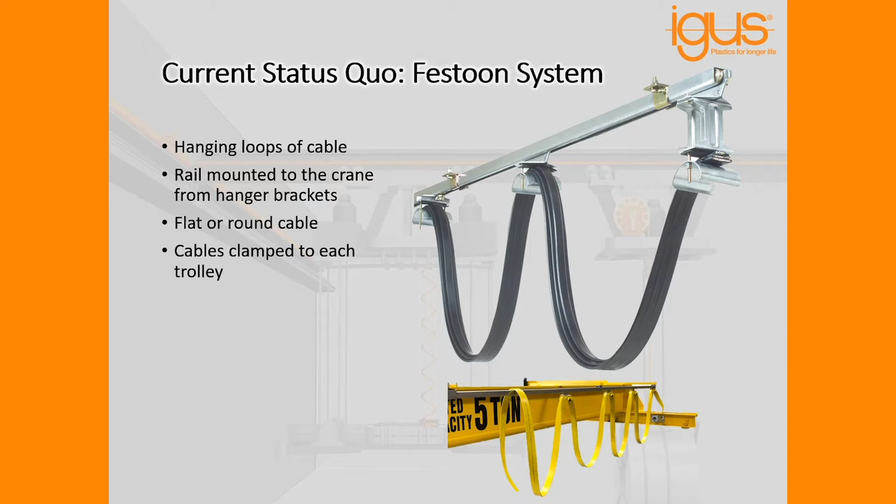It typically uses either flat or round cables depending on the configuration. The cables are typically clamped off to each trolley and they run inside of a rail like we see on the screen in this photo. So it's worked fairly well for a number of years.

However, as demands are increasing and customers are trying to improve the technology, the capability, the flexibility of their equipment, a need for faster installation and faster output has arisen. Certainly some drawbacks of the Festoon system have become apparent. And igus has noticed that and is attempting to address those drawbacks with the use of our Guidefast product.

So the Guidefast product is pictured in this photo right here, attached to a crane. What the Guidefast product is, it's a specialized trough system that allows a conventional energy chain system to be side mounted onto a crane very quickly and easily.

igus energy chains have been around for 50 plus years, and they've been used on cranes for about that long. The idea of the Guidefast product is to allow the energy chain system to be quickly and easily integrated to the crane, specifically with the types of installation requirements that are needed for a crane, typically side mounted and installed very quickly.

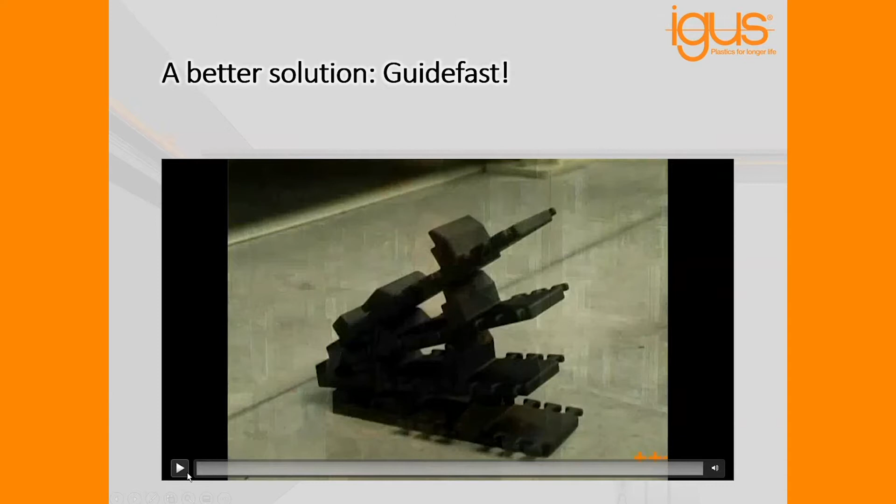So to show the installation of the Guidefast product a little bit more and to illustrate each of the components and how they work together, we have a short video that will show the system going together and give a rough idea of how it works. The core of the Guidefast system is the plastic installation bracket, which we see being laid out here. That's typically installed at 1 meter centers along the crane girder. In this example, we're just installing it on a piece of racking for demonstration purposes.

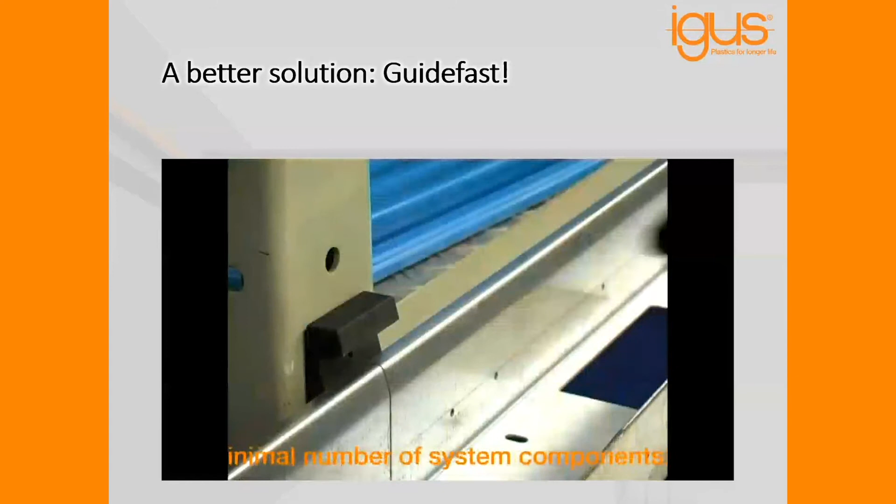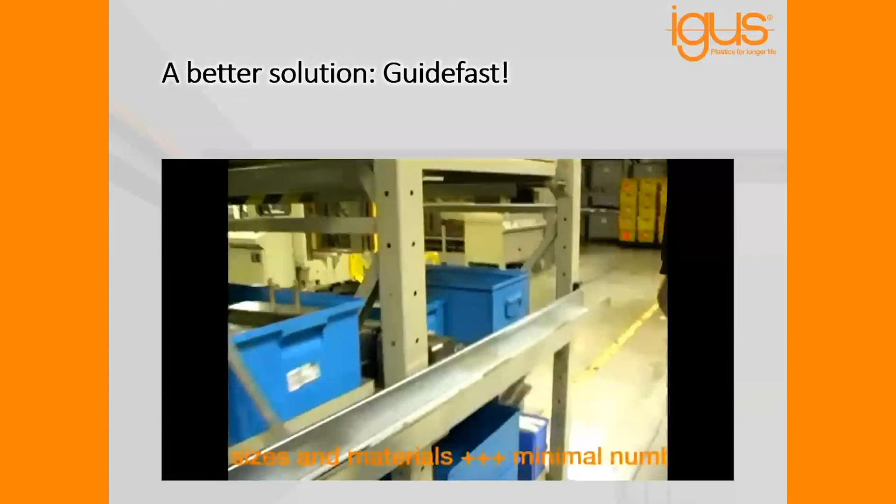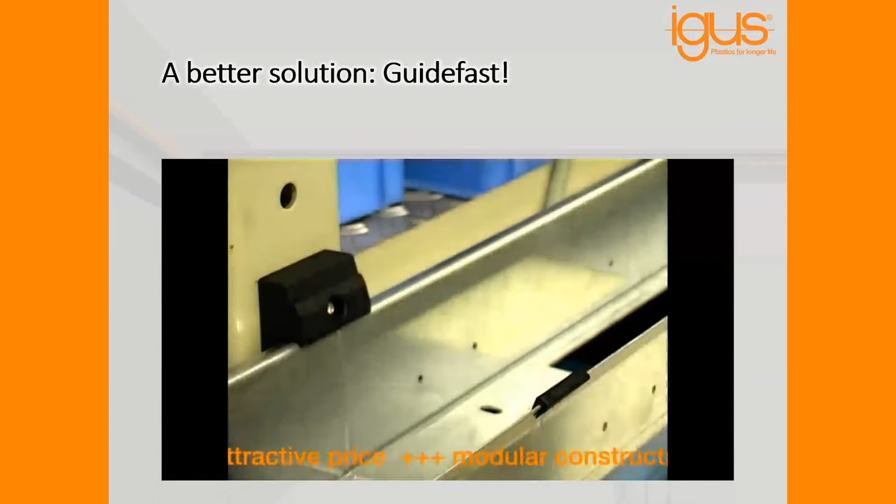The steel guide trough then clips into that plastic installation bracket, and it's secured by a clamping block and a screw. And that's repeated at each installation bracket. And there's a clip that's attached to marry up the edges of the two troughs.

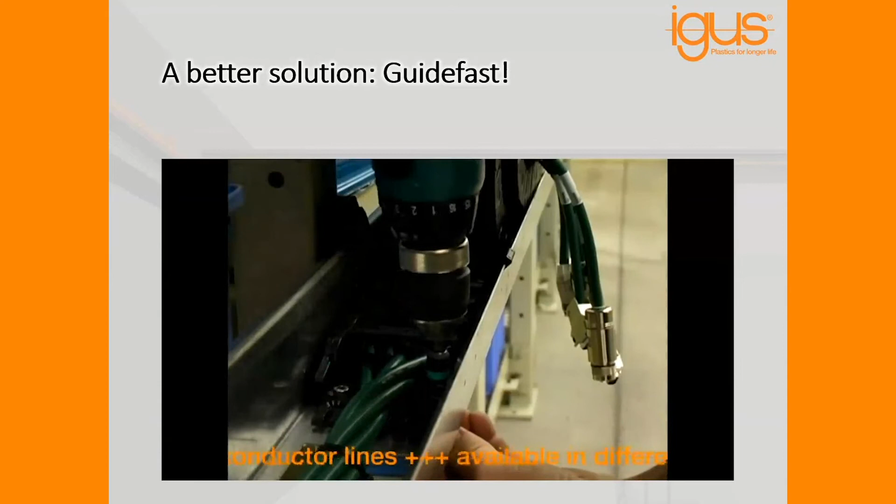Then the E-chain, which can be supplied from igus with cables already installed, as we see here, is simply laid into the trough, unrolled, and the system's ready to be put into service. So a very fast and easy way to integrate an E-chain onto a crane.

The only drawback is that it's a fair amount of work for the crane manufacturer or the end user to actually do this steel work. It needs to be welded, typically painted, drilled, and that's been a roadblock for certain customers looking to take advantage of some of the other technical abilities of E-chain.

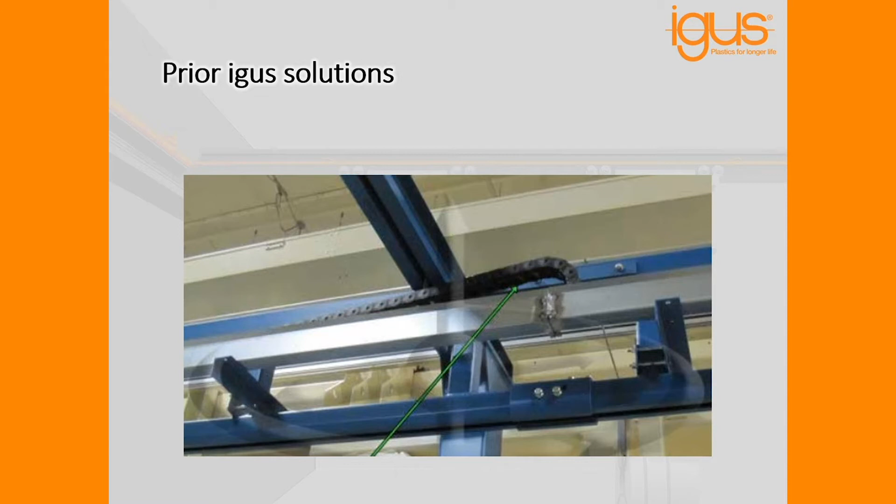So that really was the goal behind the development of the Guidefast product maybe 5-6 years ago: to simplify the installation and allow for really no welding, no painting, as little drilling as possible, something that really can be put together very quickly to reduce the overall installation time.

So if we look at the components and the sizes that are available, as we saw, the install kit there is the core piece of the system. It's available in two styles, the long version or a shorter version. The difference being the amount of strain relief teeth that can be used to attach additional static cables, sensor wires, things like that, throughout the crane beam.

So two variants there. It's designed to handle medium travels with relatively light cable fill. So when we say medium travels, we're talking typically in the range of 50 to 150 feet. Light filling, by that we mean maybe between 2 and maybe 8, maybe 10 cables total. It's available in igus 1500, 2500, and 2700 series E-chains.

What that means in terms of actual dimensions is from the smallest size being 21 by 25 millimeters of interior space up to a maximum size of 35 by 100 millimeters of interior space. So we have a range of different sizes depending on the cable package, what the piece of equipment is actually doing, what size hoist. But we can usually fit anywhere from a couple of cables all the way up to between 8 and 10 in some of the larger sizes.

And it's very rare for us to come across an indoor bridge crane application that we cannot handle within that scope of energy chain. As we mentioned, being ideal for indoor bridge cranes and shop hoists, that's really the number one application area for this product. Not to say that is the only application area.

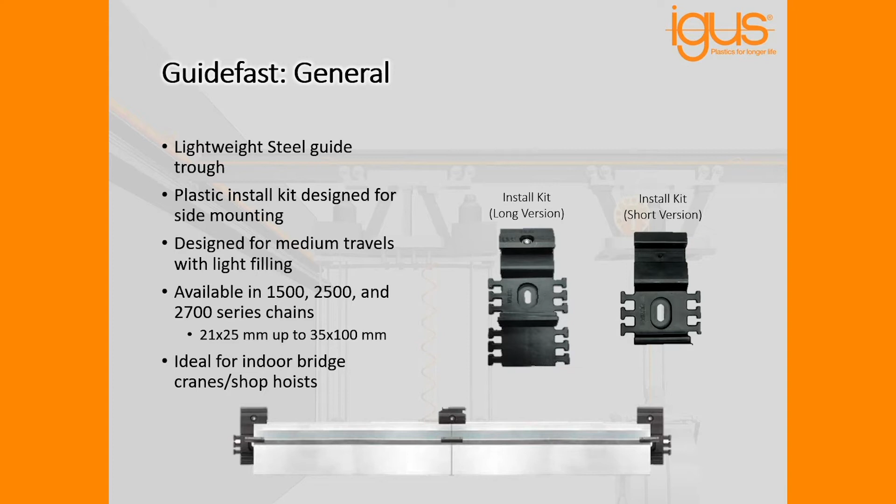We have used this product in a lot of different types of applications where mounting on the side is advantageous, moving TVs, theater applications, plenty of things like that where mounting to the side is an advantage, but by and large, the biggest advantages are offered to manufacturers and customers operating and making indoor bridge cranes and hoists.

Now we'll spend the next couple of slides going through the pros and cons of energy chain versus Festoons, and also how that relates to the Guidefast system in and of itself, and how the Guidefast system can offer some advantages specifically to crane manufacturers. So as we saw in the video, the way that the Guidefast system is installed is simply by one screw every 1 meter length. So you see the plastic install kits. Those are simply through bolted.

We have some customers that will drill and through bolt. We have some customers that will use the stud welding gun and will weld a threaded stud on at 1 meter intervals. Both work equally well, just dependent on customer preference. But it's only one fastener that's needed every 1 meter length. Makes for a very fast and easy assembly.

And we're also able to do two hoists in one single trough system. So if you are a manufacturer who frequently builds cranes that have two hoists on one beam, within that one trough system, we're able to do two energy chains. So we can feed both hoists with two chains running in one trough.

The reason for that, and we'll see a little bit later with some of the additional graphics, is that the energy chain essentially only needs to be mounted in the center point of travel, and then it will travel half of the distance in one direction, half the distance in the other direction. So with that center fixed point, you can mount two chains, essentially a mirror image configuration. We call it an opposed configuration, and it allows both of the hoists to move back and forth with their cable management in a single trough system.

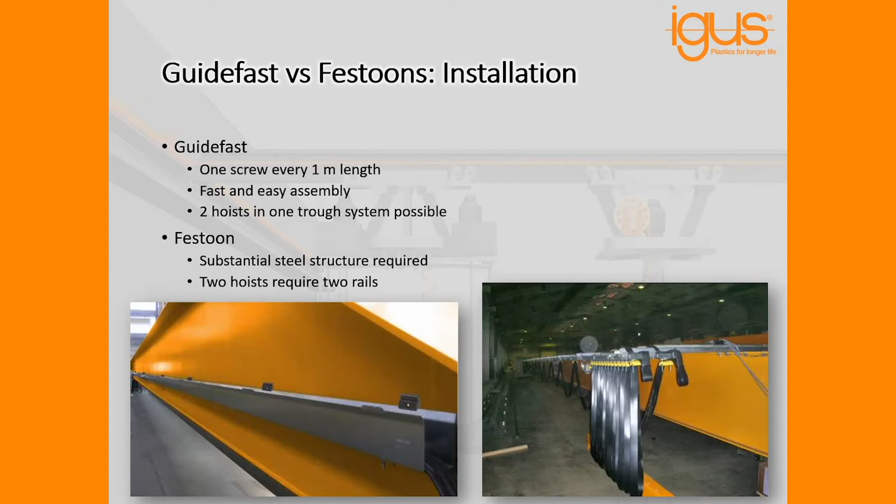So a substantially greater amount of steel structure that needs to be fastened to the crane, a larger number of fasteners, more holes that need to be drilled. So it definitely becomes apparent which solution is easier and faster to actually attach to the crane beam. Next up, we'll talk about transportation.

So one of the things that a lot of our crane manufacturing OEMs, people that are building these cranes as their core business and selling them to end users, they always want to be able to install these things into their customers' facilities as quickly as possible.

Typically, they pay more for on-site labor that's doing installation and service work at their customer, and their customer also wants their crane installed as quickly as possible. They want minimal downtime. If they have a project going on, they want it started and completed as quickly as possible. So in order to facilitate that, they try and do as much pre-assembly in the shop, in the manufacturing plant as possible.

How that relates to Guidefast, as we see on the left-hand side, this particular manufacturer who we work with is able to install the Guidefast system onto the crane back in their shop. So they transport it down the road with the energy chain and the cables already there. So they get to the customer's site, they hoist it up, and just connect the ends, and there really is no work that needs to be done to install the cable management system as part of the installation at the end user's site.

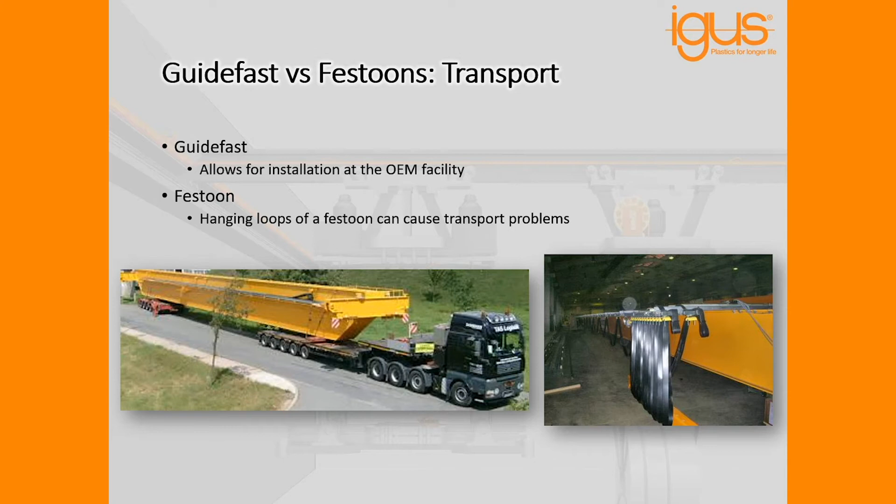Comparing that against the Festoon system, you can see that the cable loops of the Festoon hang down below the bottom edge of the crane beam. The structure hangs out substantially farther than the width of the crane beam. So that would be much more difficult, if not impossible, to try and transport. Usually what would end up happening is that the Festoon system would need to be installed on site, which would lead to a greater amount and a longer duration of installation time at the end user's location versus work that could instead be done at the OEM shop.

So for a two hoist system, we can take a second one of these systems, flip it, make it a mirror image, put its fixed point right in the center, and let it articulate back and forth, doing the two chains in one trough system.

Some additional points on operational area. An energy chain can be installed tight to the girder. Typically, the height is 18 inches or less of the overall system. That's driven by the bend radius of the cable. So the larger the bend radius of the cable is, the larger the loop height of that energy chain will be. Certainly can be reduced less than 18 inches, depending on the cable package. Smaller cables will bend tighter, lead to a tighter loop. But in this product, never more than 18 inches.

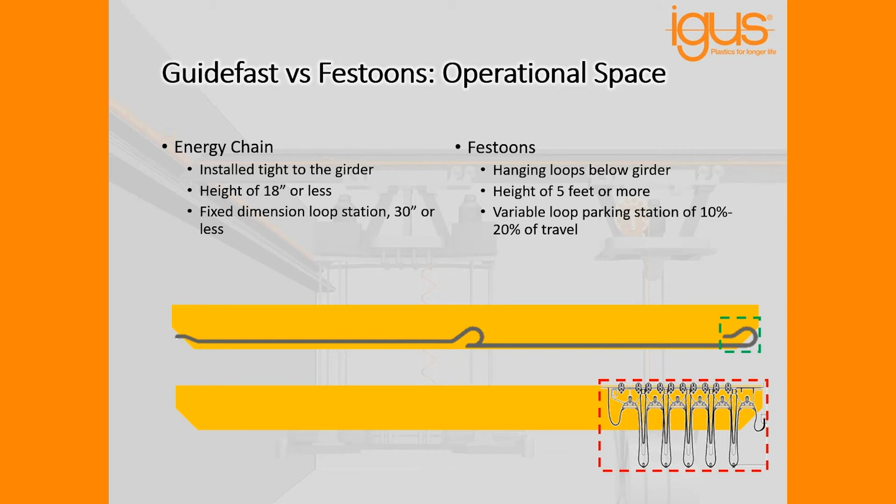So with an energy chain, our area of unusable space is kept to a minimum, regardless of the travel distance, maximizing the amount of travel distance for the hoist and clear space for working.

Next up, we'll talk about the service and maintenance of the two different systems. With an energy chain, no parts are marked for wear. We say that once the system is put into service, if it is specified correctly and installed correctly, and it remains installed in the proper configuration, it should be truly maintenance free. It should be set it and forget it, and the system will achieve full service life completely on its own without any additional intermediate service or maintenance.

Cables are fastened into the energy chain by two clamps, one at the moving end and one at the fixed end. So if a cable did become damaged and needed to be replaced, or if there needed to be an upgrade, adding something new, the cable can be released at those 2 points. An old cable can be used to pull the new cable in. In certain cases, we'll even install pull strings that can be used to add things at a later date. Cables will be clamped back off at the 2 points, and the system can be put back into service.

Comparing that versus a Festoon system, sometimes the trolleys do require a regular service, a lubrication, a greasing procedure. On smaller Festoons, sometimes that's not as much of a concern, but as the systems start to get larger, there do start to become some maintenance items that are required.

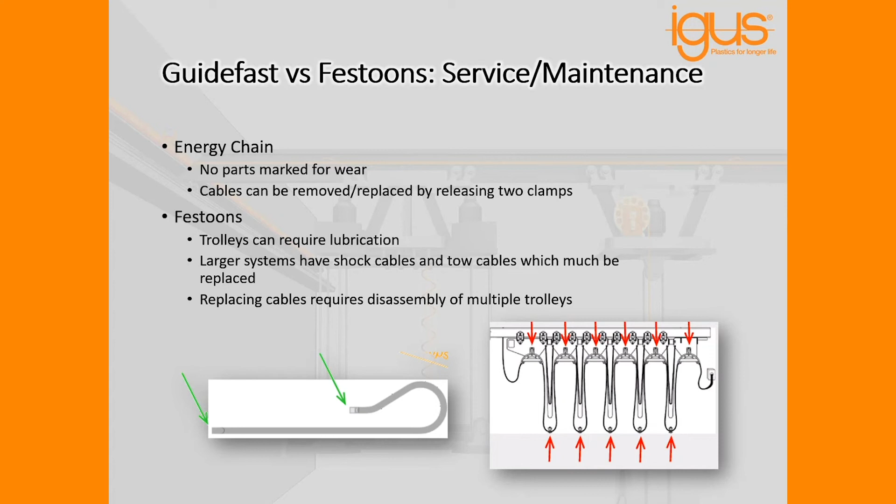Next up, we'll talk about the cables themselves that go into the respective systems. With an energy chain, off-the-shelf round cables typically are used and combined. igus manufactures a complete range of all different types of electrical cables that are designed for use in energy chain systems. And all different types can be combined. Fiber optic, data, power, signal, whatever it is that's needed can all be combined into a single system, as well as different types of energy, such as hydraulics, air lines, media lines.

It maintains a defined bending radius at all times, so that the manufacturer's suggested bend radius on the cables is always adhered to, and the cables and hoses will achieve full service life.

Comparing that against Festoons, flat cables are normally used. There is a fairly comprehensive range of flat Festoon cable available for simple applications where just power and a bit of signal is required. Unique combinations, if you have a customer that wants some special additions to their cranes, sometimes the flat cables are not always available.

Unique combinations can require either custom cables, where if a customer wants a special fiber optic element and an air hose or something like that, either a composite cable needs to be made, which can be rather expensive and have a long lead time, or round cables can be used, but they require some special clamping elements to manage those cables on the Festoon trolleys.

One other thing to mention with the flat cable, where all of the cable elements are essentially extruded together in one jacket, is that if a single conductor fails in that flat Festoon cable, say it's something that has 15, 20 conductors, there isn't really a way to replace just the failed conductor. That whole cable needs to be changed.

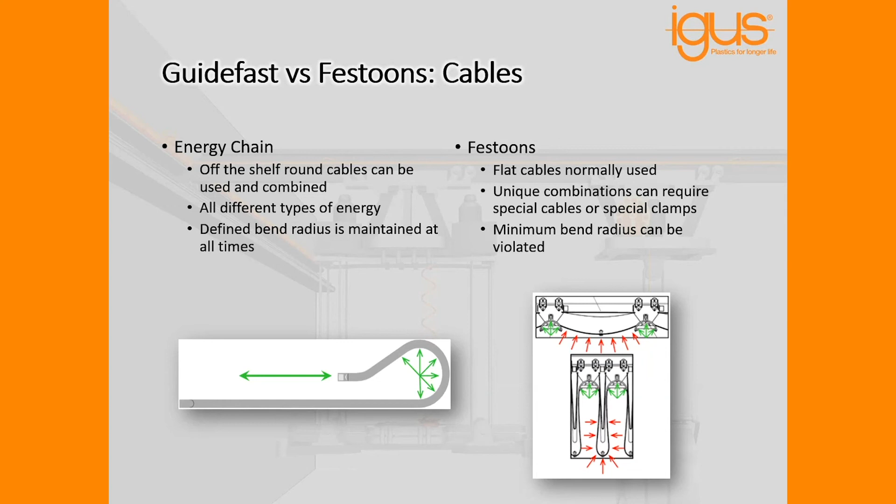And the last point on Festoon systems, as the red arrows here are indicating, Festoon does a fairly good job of maintaining a minimum bend radius around the saddle, where there is a structural component that fixes a bend radius. But at the bottom of the loop, there is no such component, so the bend radius can be exceeded, and the cable can also see some strain as it's pulled out and pushed back. So typically we are able to achieve a longer cycle life, longer service life of cables installed in an energy chain versus Festoon cables.

Also, further on the cables, in terms of cable length and type of cable required, for both of these systems, energy chains and Festoons, it's recommended to use a dynamic cable, a cable that's rated for continuous flexing operation. Continuous flex cables are by nature higher quality and therefore more expensive. So both systems require that higher grade cable to achieve a full service life. But where they differ is that an energy chain typically requires somewhere in the neighborhood of 51% of the travel of that high flex cable.

So as we spoke about, the system travels half the distance one way, half the distance the other way. So if this is a 100-foot travel, we really only need 50 feet of cable to meet halfway, plus a small amount of cable to deal with the curve here and get back around going in the direction of travel. So we estimate that at roughly 51% of the travel.

Comparing that against a Festoon, if a Festoon is going to do 100 feet of travel, it's going to need that cable all the way from point 0 to point 100. And it's also going to need a little bit of additional slack. You can't have the cable pulled completely drawstring tight over that 100-foot travel. There needs to be some slack to allow for some flexibility. So that typically requires somewhere in the neighborhood of 110% of the travel worth of cable. So a 100-foot travel would require 110 feet of cable.

So with the energy chain, it's possible to run lower cost static cable up to that center termination point and then run 51 feet of more expensive continuous flex rated cable inside of the system, and then make your terminations at the hoist. Whereas with the Festoon system, you'd typically be running your lower cost static cable up to the 0 point in the travel, and then you have 110 feet of that more expensive continuous flex rated cable.

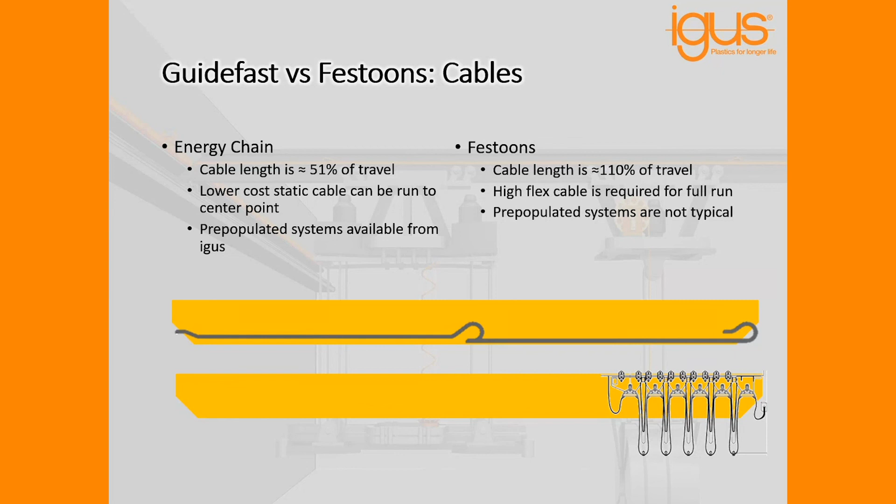Next up, we'll talk about some of the resources that we offer. If you've been watching the webinar and are interested in trying out the Guidefast system in your facility, think you may have a need for it, we offer online CAD files and configuration tools for the entire Guidefast product family, as well as all energy chains, regardless of their size. So if you're looking to configure this and want to see how it fits onto your crane, we do have a full suite of 3D CAD data.

We offer visits from our igus representatives. We do offer visits in all 50 states, as well as Canada, Mexico, and globally. We can conduct measurement surveys where if you have a system where you would like to implement this technology, but just don't have the time to deal with the measurements and gather the information for us, let us know. We'll be happy to come in and take that work on for you.

We can identify cables as well. If you don't know exactly what electrical requirements you have, and you just have a spool of cable that you pull off of to build, we can help to identify those electrical requirements, specify the right cables, design a complete system and provide a quote.

We offer on-site installation service. So if you have manpower issues on the service side, we are able to offer an igus team of people that can come in and install these systems directly onto the crane for you. Or if you do have a dedicated service team that has plenty of capacity, they just may not have the know-how to deal with a new product like this. We also offer on-site training where igus personnel will travel to your location. They can work with your service personnel to install the first one and train them on best practices so they're equipped to do subsequent systems.

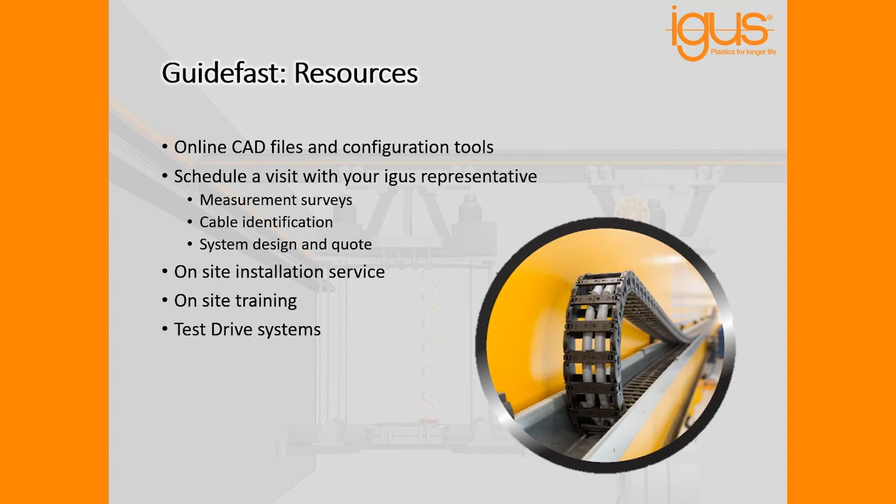And then finally, this presentation has been purely on Guidefast, which is devoted to more medium distance travels with cable fill packages towards the lighter side. igus is certainly able to do much more than just the Guidefast type and size applications. If you've been watching this webinar and say, it's good technology, I like the energy chain, I like the benefits that it offers versus a Festoon, but my application is just a lot bigger than what has been discussed thus far, we have a complete range of sizes and styles to deal with just about any application that you could think of.

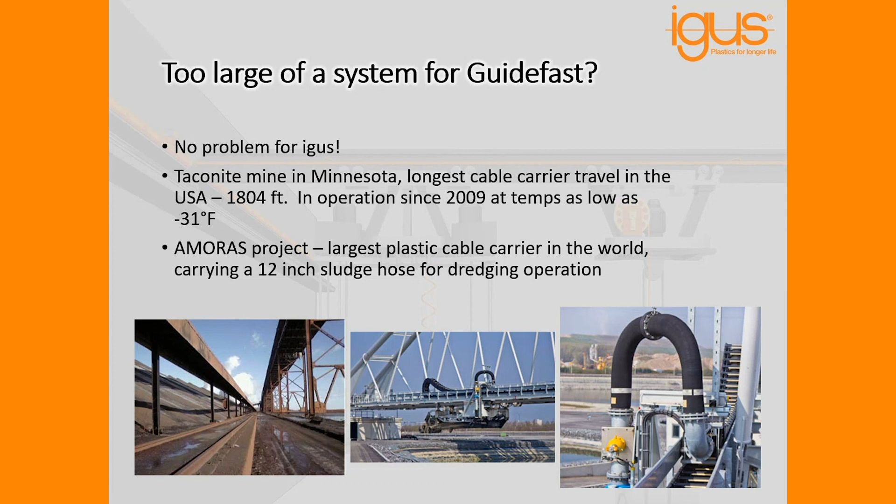The photo on the right is a project called the AMORAS Project in Belgium. It uses the largest plastic cable carrier in the world, which is the igus E4 350. It carries a 12-inch diameter sludge hose for a dredging operation. So as the dredging application is carried out, the mud, the rocks, the silt, the sand is pumped up through that hose, which is carried by that very large energy chain that you see in the two photos in the center and on the right.